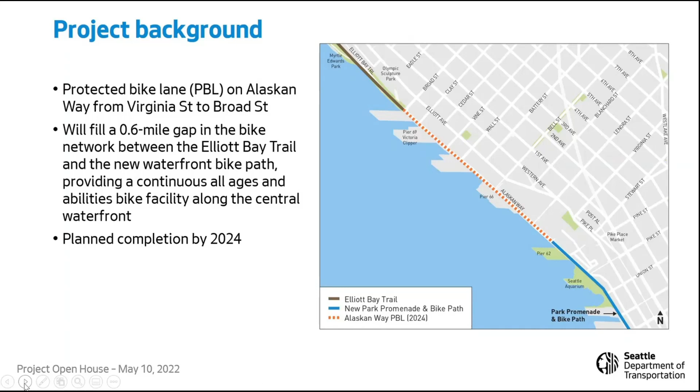Currently, this section of Alaskan Way carries 4 lanes of traffic with parking bays in select sections and no bike facilities. This project stems from the Seattle Bicycle Master Plan, which recommends protected bike lanes at this location that are physically separate from car and truck traffic.

The land uses and destinations along this project include Pier 66 Cruise Ship Terminal and Conference Center, Pier 69 and the Victoria Clipper Terminal, the Port of Seattle offices, hotel, restaurants, all on the west side. And on the east side, there are condominiums, a hotel, a restaurant, all south of Bell Street. And north of Bell Street, there are train tracks on the east side.

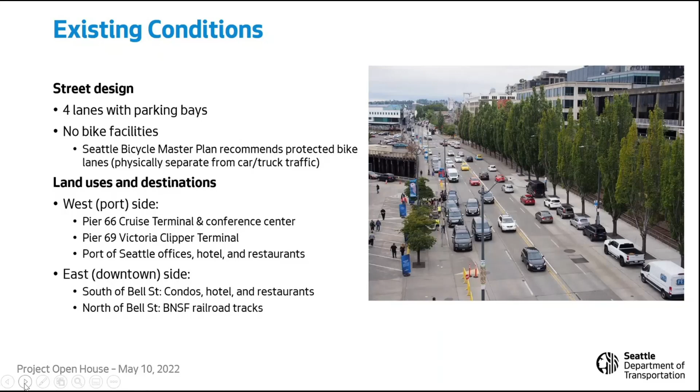There are a lot of changes happening along the waterfront, so we wanted to highlight a few of those changes that are important to consider related to this project. Starting this year, cruise ship sailings at Pier 66 will increase by 70%, with an average of 5 sailings a week during the peak summer season. This will increase activity on Alaskan Way near Bell Street.

Another change includes, by 2023, the new waterfront bike path south of Virginia Street will be complete and open for use. By that time, the waterfront project will also have completed a new connection to Elliott Avenue and Western Avenue in Belltown, which is forecasted to reduce non-sailing day traffic on Alaskan Way in our project area.

And looking forward, in roughly 10 years' time, the seawall north of Pier 62 is slated to be rebuilt. This segment of seawall construction will provide a big opportunity to redesign this northern portion of Alaskan Way, similar to the work currently happening to the south. In the meantime, this project aims to provide a near-term bike connection ahead of that much larger opportunity.

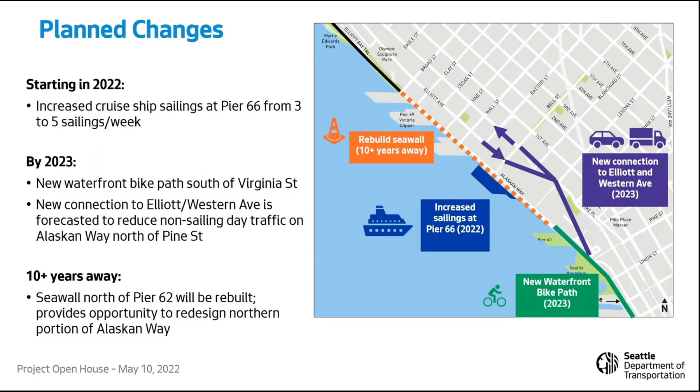Before we share the project concept, we also wanted to spend a minute discussing activity at Pier 66 since it is a major destination in the project area. As you may know, Pier 66 is located on Alaskan Way at Bell Street and serves as a cruise ship terminal with sailings from April through October, with 5 sailings a week during the peak season. For each sailing, there are up to 5,000 cruise ship passengers getting on or off each ship over a 10-hour period.

Next, we'll move on to the proposed concept for this project. We are proposing a design that balances this really important bike connection along the waterfront with operations at Pier 66 and Pier 69. From Broad Street to Wall Street, there will be a west side two-way protected bike lane at street level, in orange on this map.

From Wall Street to Bell Street, there will be an east side two-way shared use path along the existing sidewalk shown in purple. And from Bell Street to Virginia Street, there will be an east side two-way raised protected bike lane along the former streetcar alignment shown in green on this map.

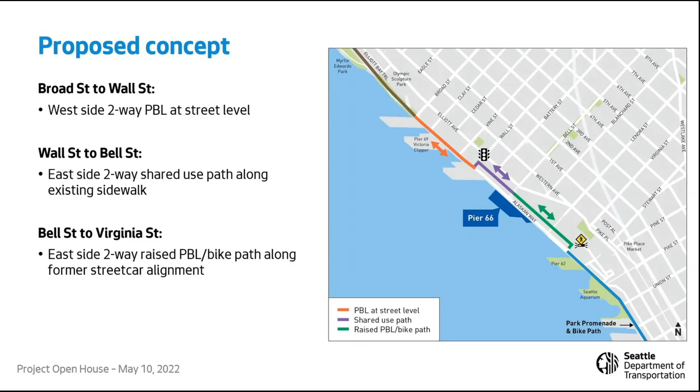We're proposing a west side bike facility on Alaskan Way north of Wall Street because it connects directly to the Elliott Bay Trail, which is on the west side as well. It also avoids intersection conflicts on the east side of Alaskan Way, including with northbound right turning vehicles. We're also able to maintain existing loading space in front of Pier 69.

South of Wall Street, we propose an east side bike facility on Alaskan Way because it would avoid the loading conflicts at Pier 66, which are much higher than at Pier 69, and also maintain space for sailing day operations. It separates people biking and walking in the busy area south of Bell Street, and the shared use path is only proposed for a short segment where space is most constrained and pedestrian activity is lower.

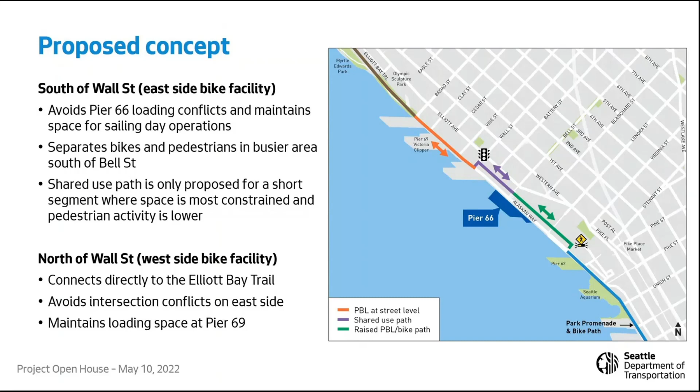This next slide shows the cross sections of what our proposed concept would look like. From Broad Street to Wall Street, the protected bike lane will be at street level between the parking lane and sidewalk on the west side. From Wall Street to Bell Street, the shared use path is on the east side. This space will be shared by people walking and biking. From Bell Street to Virginia Street, the raised protected bike lane will be on the east side, separated from the sidewalk by existing street trees and landscaping.

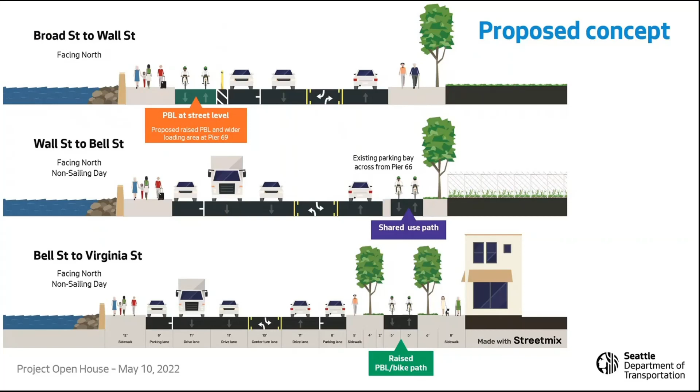Because the bike facility transitions between the east side and the west side of Alaskan Way, there are two proposed crossing locations at Wall Street and Virginia Street. The graphic on the left shows a proposed diagonal bike crossing and all-way walk at Wall Street. The signal at this intersection will be upgraded to provide a safe and direct crossing for people walking and biking.

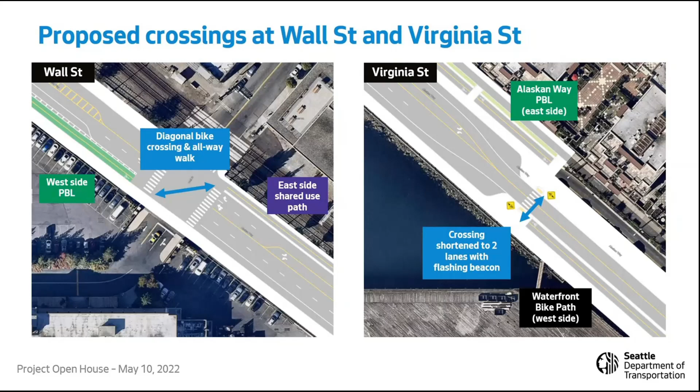The graphic on the right shows our proposed crossing at Virginia Street. Here, Alaskan Way narrows down to 2 lanes at this location. We are proposing to add flashing beacons to provide safe transition from the waterfront bike path on the west side to the new facility on the east side.

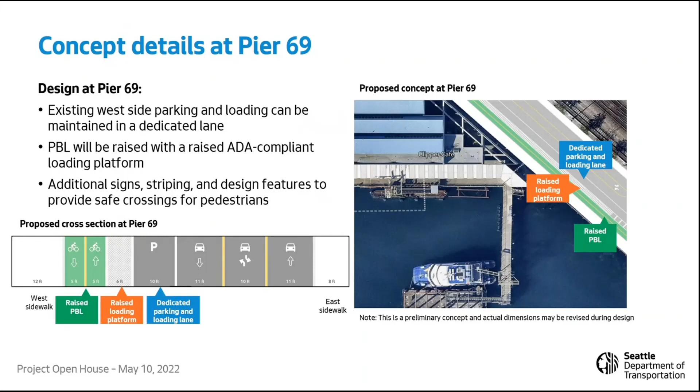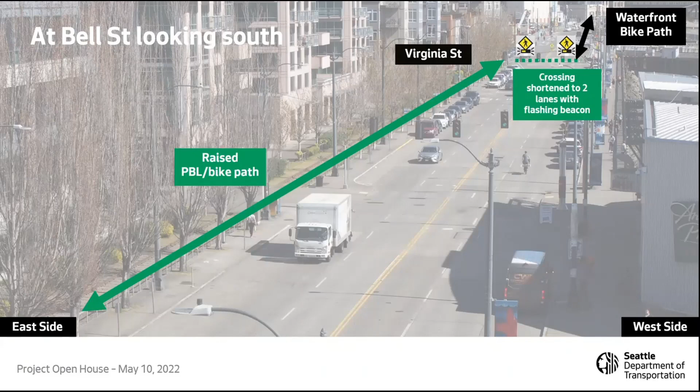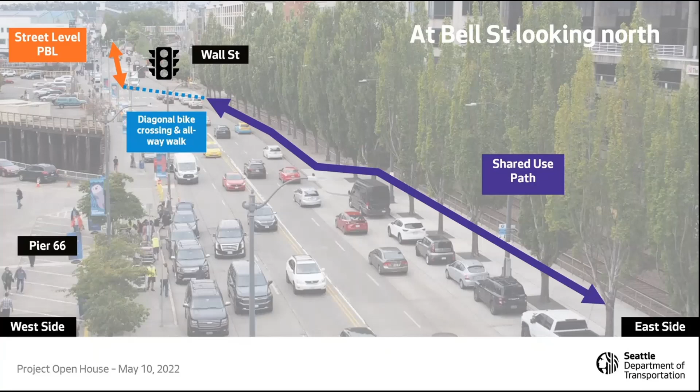That's an overview of our proposed concept, and I'll hand it back to Ching to talk about our next steps. Thank you.

We began the project planning process in late 2021. We are currently in early design process, targeting to reach 60% design by this winter and 90% design in spring 2023, and finalize the design by summer 2023. Currently, we anticipate construction to begin in fall 2023 and reach construction completion by fall 2024. Please note that the waterfront bike path south of Virginia Street is set to open by the end of 2023, and we'd like to open this project close to that opening.